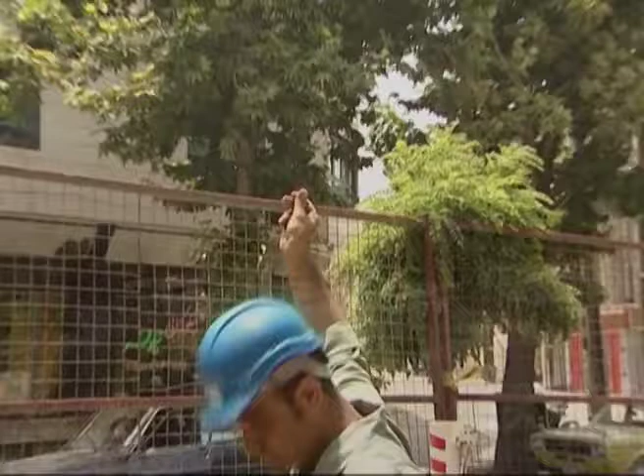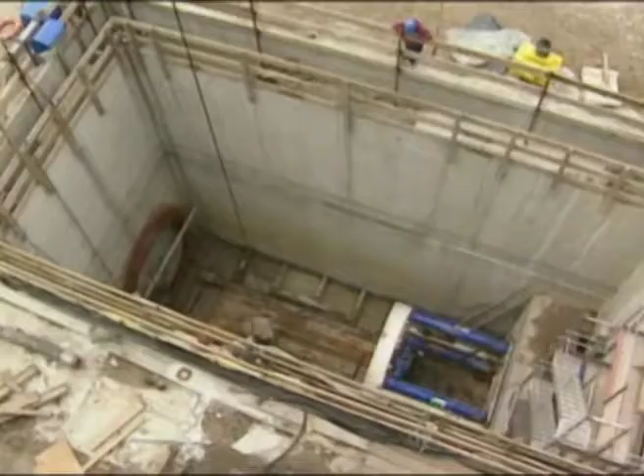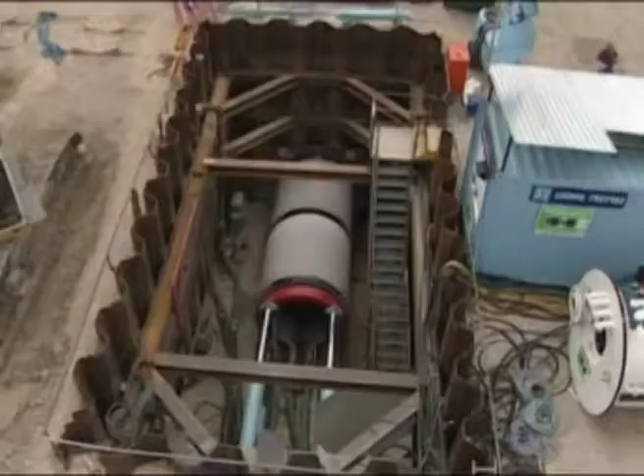During the last several decades, introduction of trenchless technologies have brought about great changes in the installation of underground services, particularly in large cities. Trenchless technologies enjoy numerous technical, economic, safety, environmental, and social advantages.

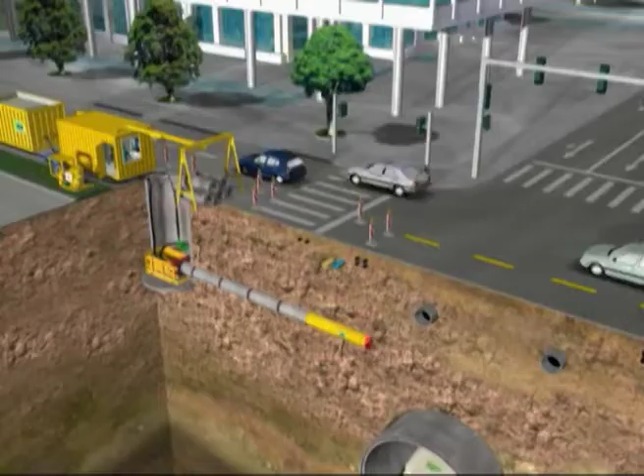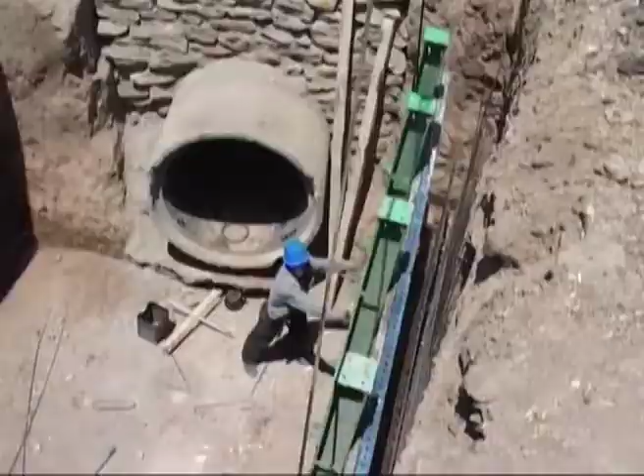Technologies such as pipe jacking and micro-tunneling have enabled engineers and contractors to overcome traditional limits of open trench pipe laying techniques and are becoming increasingly important in the installation of new service pipes and sewer pipes.

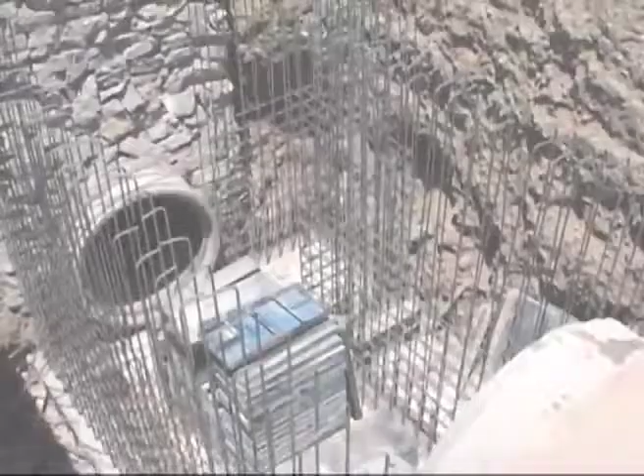The intensification of global warming in recent years and the dangers it poses to the very survival of man has highlighted the urgency of sustainable development in large as well as small countries in all parts of the world. Slowly but continuously, old approaches to the installation of underground services are being replaced by environmentally friendly technologies.

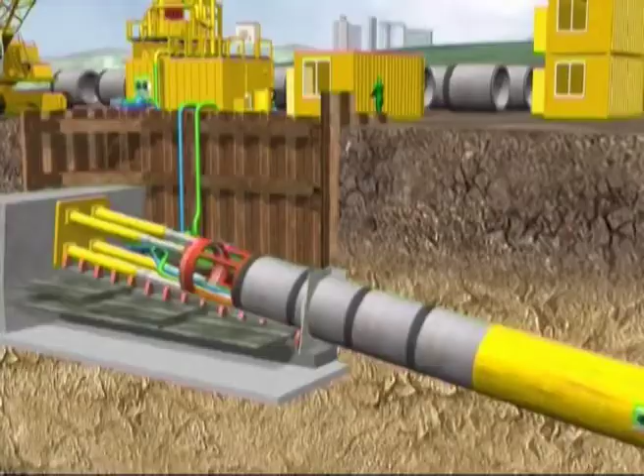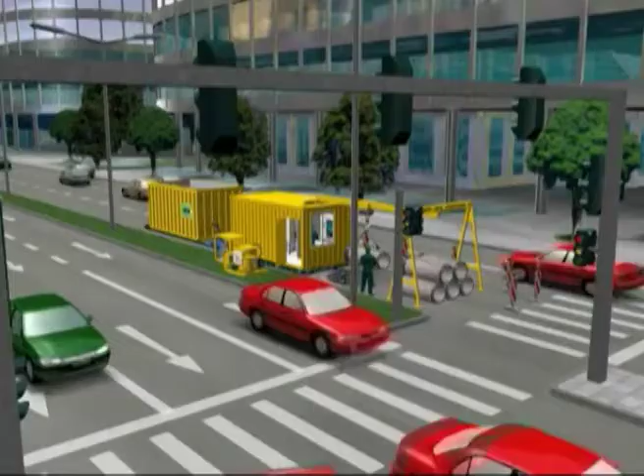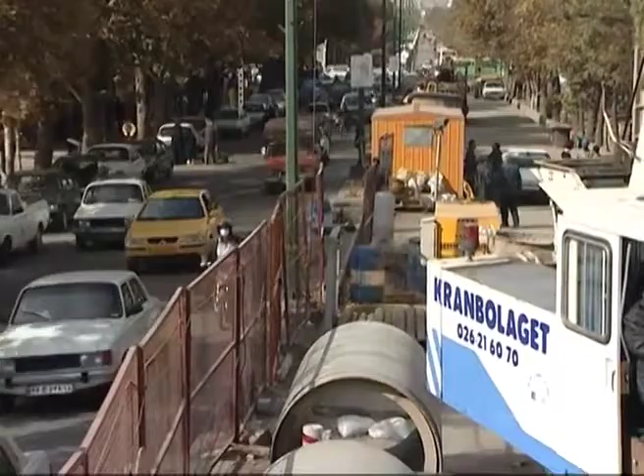Pipe jacking causes minimal disruption on the construction route, so there is virtually no interference with the flow of traffic or impact on the local economy. In fact, the whole construction site can be located in a way that only one lane is blocked.

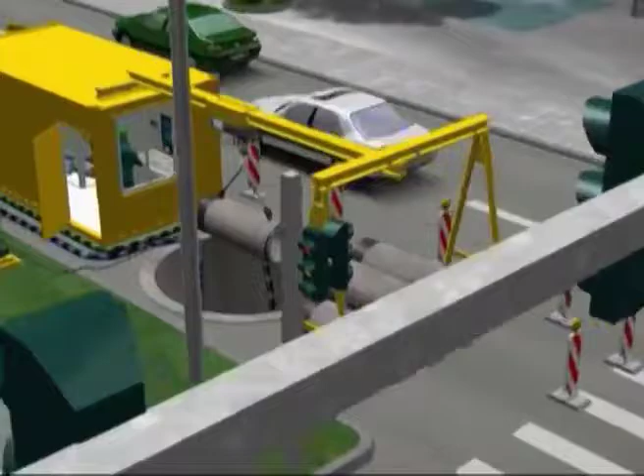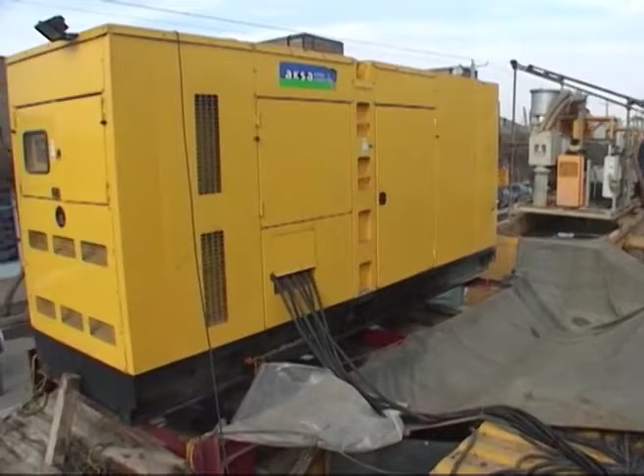Site mobilization including machines and equipment are mounted on a platform adjacent to the starting shaft. In Hamadan sewer pipeline project, the containers and some equipment were placed on top of each other to make the construction site as compact as possible.

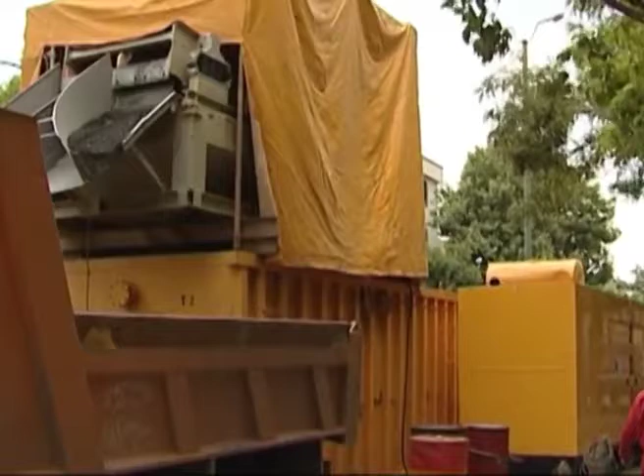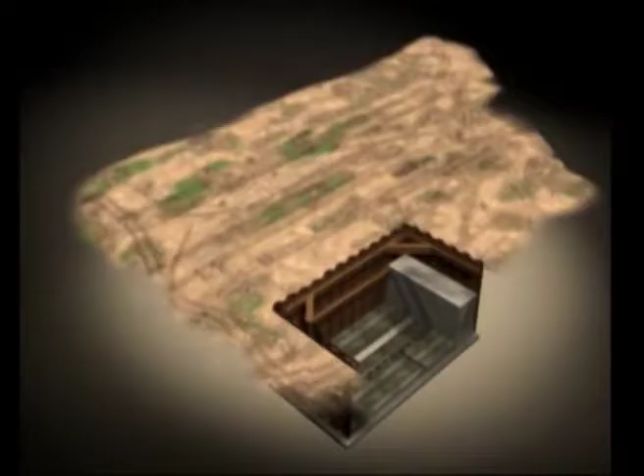In order to install a pipeline using pipe jacking and micro-tunneling techniques, at the first stage thrust and reception shafts are constructed. The pits are either multilateral or cylindrical. The depths and dimensions of the pits depend on the slope, inclination and length of the pipeline.

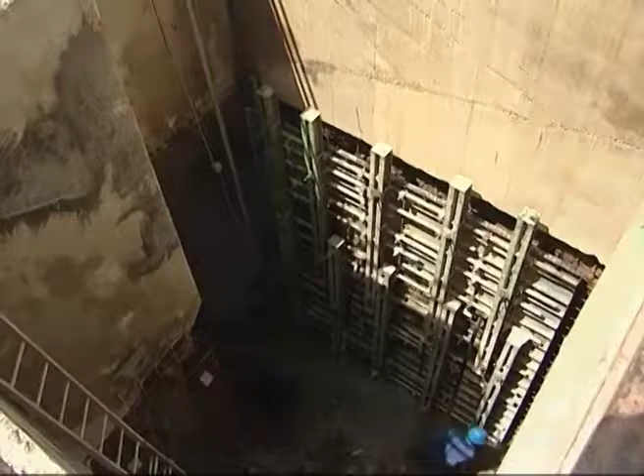In the case of Hamadan sewer pipeline, the starting and reception shafts consisted of rectangular shafts of reinforced concrete with average depths of 7 meters and dimension of 20 to 30 meters. In Hamadan project, the distance from the driving to reception pits ranged from 60 to 120 meters.

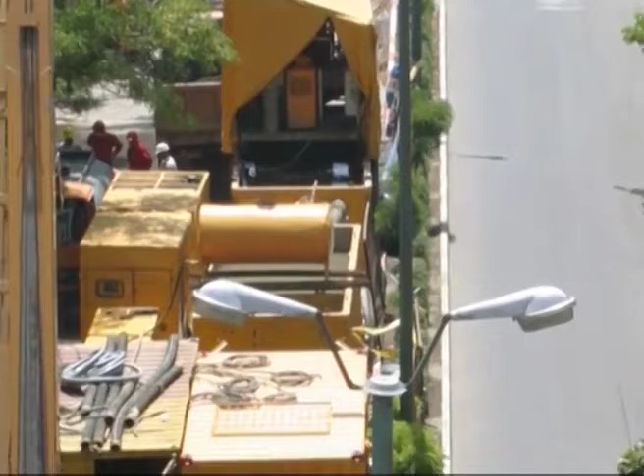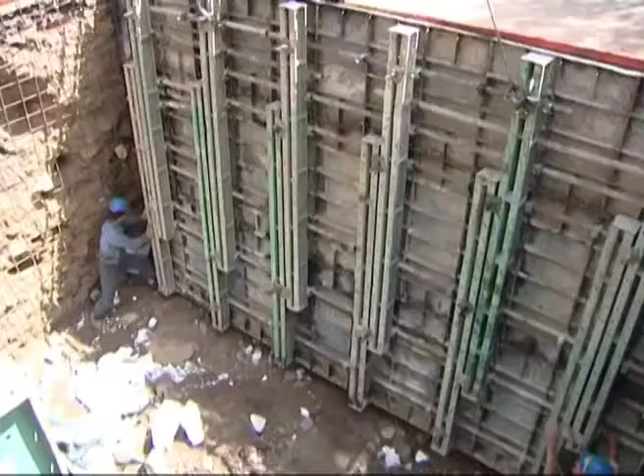However, there is no theoretical limit to the length of individual pipe jacks, and under suitable geological conditions and by using the right equipment the length of pipe jacks can be increased to 1,000 meters or more. Excavation operations and consolidation of pit walls are carried out stage by stage until the desired depth is achieved.

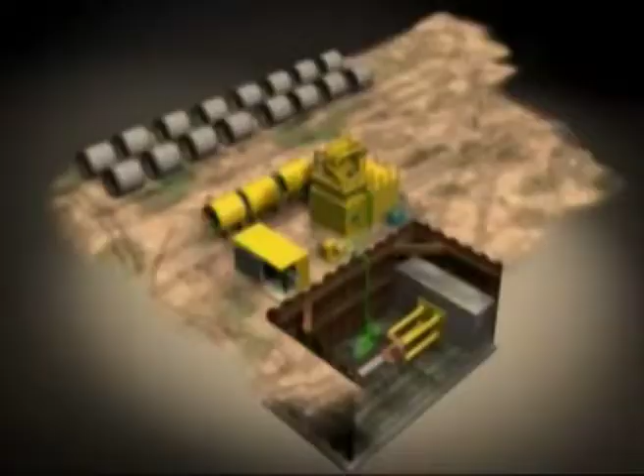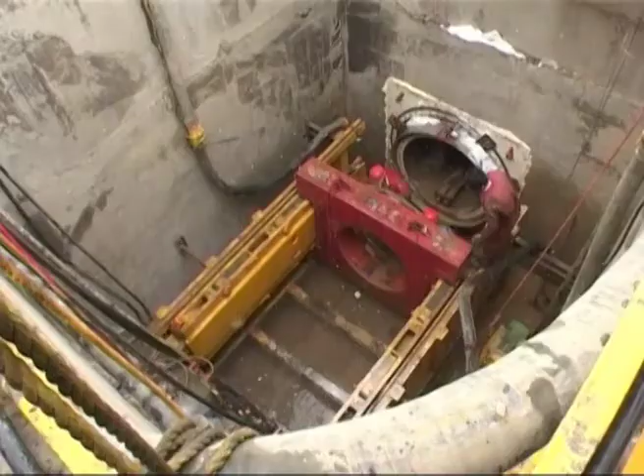In Hamadan sewer pipeline project, all the walls of the driving pit were made of reinforced concrete. A thrust wall was also constructed in the back of the pit to provide a reaction against which to jack, and a thrust ring was employed to transfer the loads. Since the jacking frame remains in the driving pit throughout the pipe jacking operation, the floor of the pit is also covered with reinforced concrete to increase its strength.

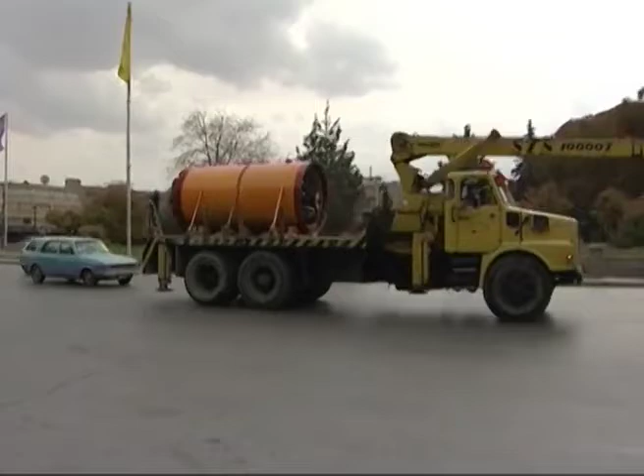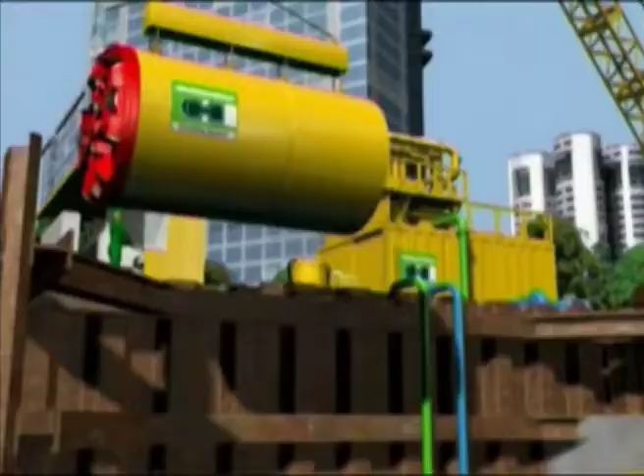The pipe jacking machine and related equipment are transported to the driving pit by a trailer truck. After the pipe jacking machine is placed into the driving pit by a crane and aligned, and ancillary parts and equipment are connected, jacking operations get underway.

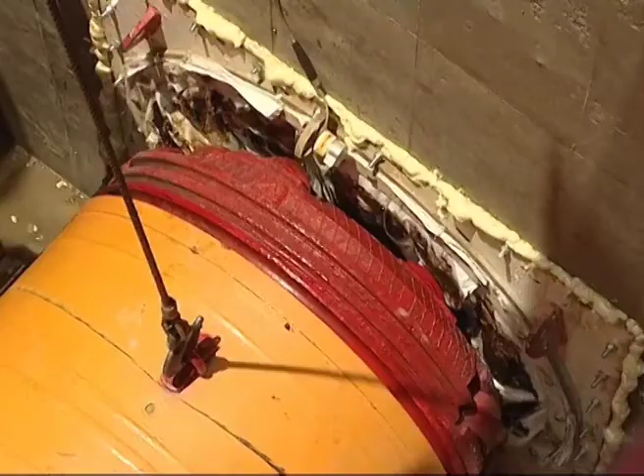The cutting wheel of the boring machine rotates at the speed of approximately 3 to 4 times per minute by means of a hydromotor attached to it. Rocks and stones are crushed by the discs of the cutting wheel. The boring machine is pushed forward by a hydraulic jack situated inside the driving shaft.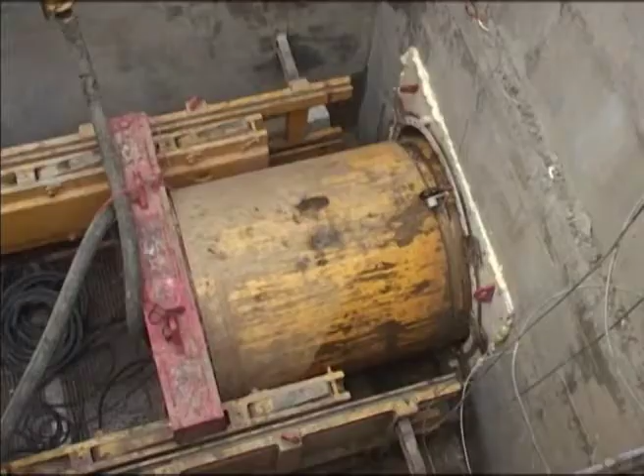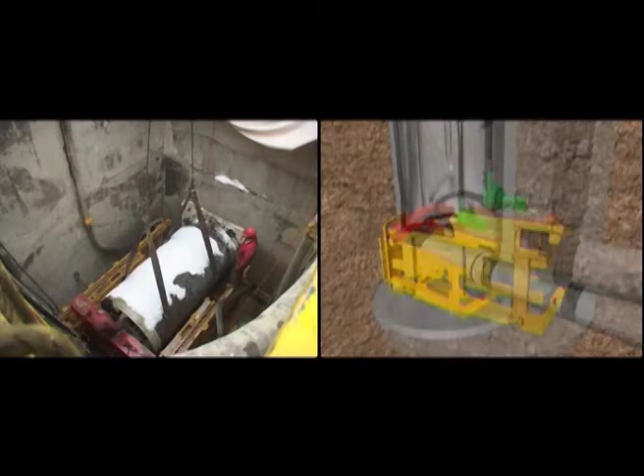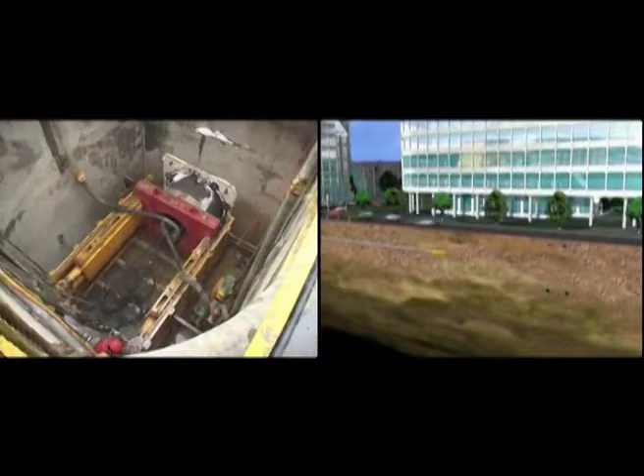In Hamadan sewer pipeline project, the first pipe was jacked after the microtunneling machine and its ancillary parts, with a total length of 6 meters, had been placed into the driving pit and started excavation operations. The pipes are loaded into the driving pit one after another and jacked. This operation continues until the microtunneling machine reaches the reception pit.

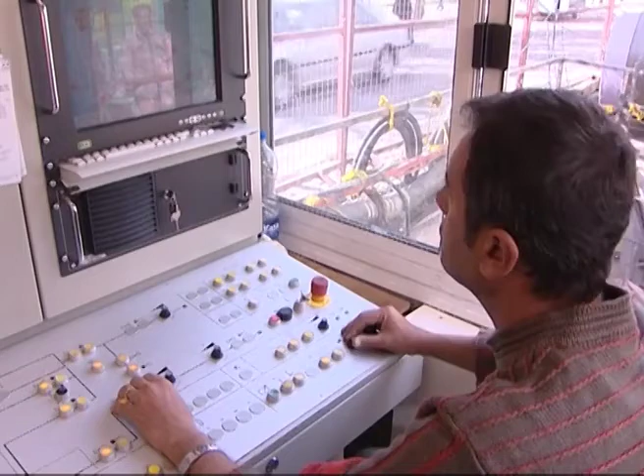The control room is situated right next to the driving pit. Orders to commence jacking operation, as well as monitoring, aligning and correcting the direction of the tunnel boring machine are carried out by operators stationed in the control room.

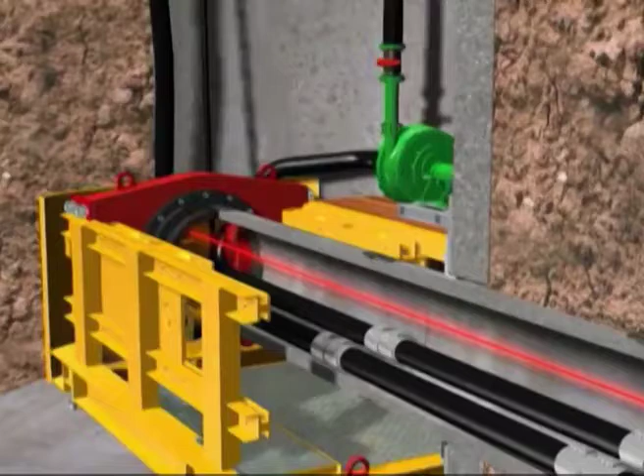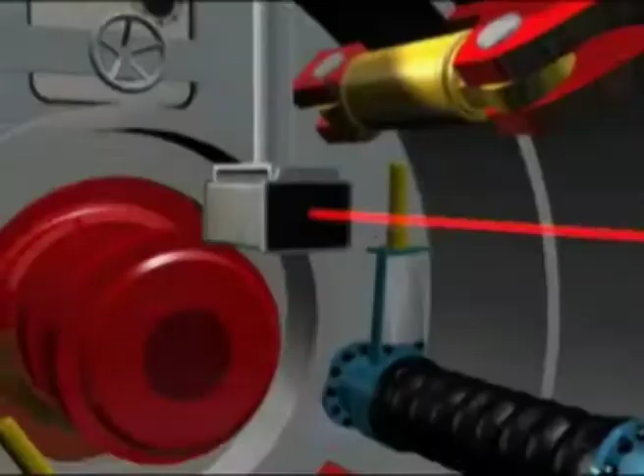Therefore, the position of the cutter head is continuously updated with the help of a laser measuring system. This laser system is positioned in the starting shaft, meeting the target that is installed in the cutter head. The laser target identifies any deviation which may occur. The coordinates are transferred to the steering computer in the control room and visualized on the screen.

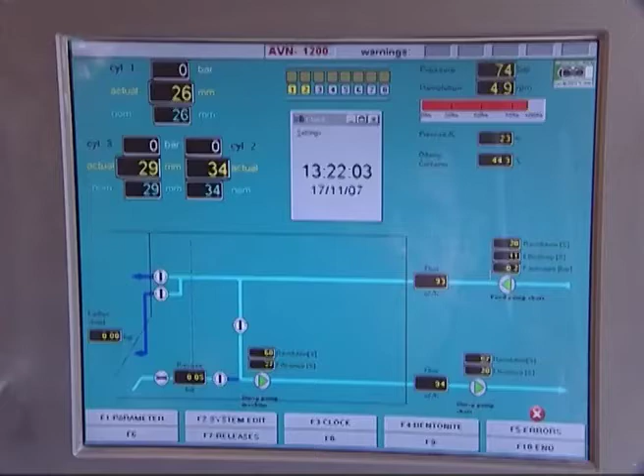Any deviation in direction can then be corrected by experienced operators by adjusting steering cylinders at a push of a button on the computer control panel, in accordance with the jacking speed, ground conditions and inclination of the line.

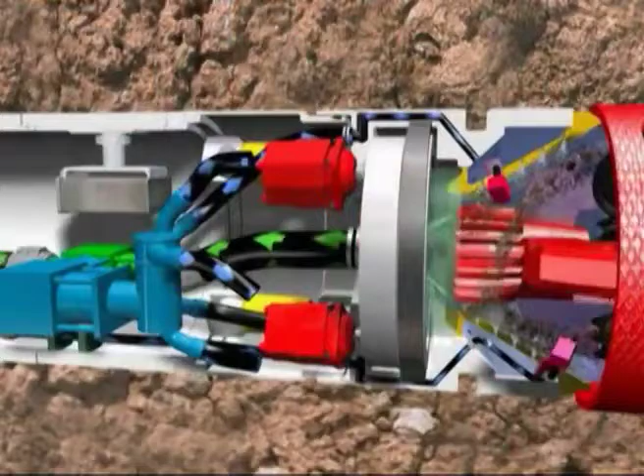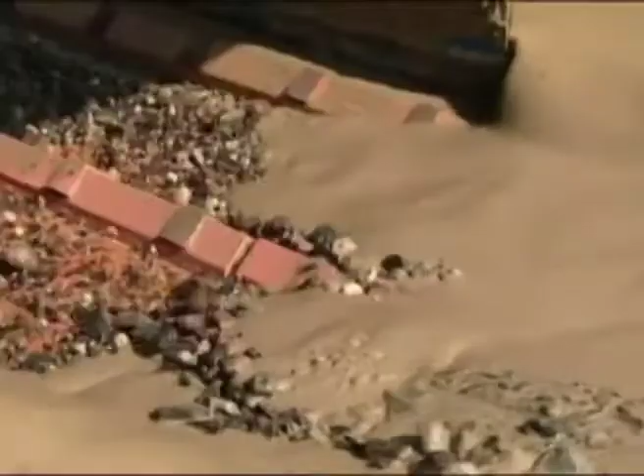To remove the material excavated by the cutting wheel, water from tankers located outside the driving pit is transferred by the feed pump to the tunnel face. The mixture of water and excavated material is transferred by the tunnel pump to the driving pit, where the slurry discharge pump removes the excavated material and pumps it to the separation plant. Thus a closed circuit, whereby the spoil is continuously removed from the system and clean water returned to it, is created.

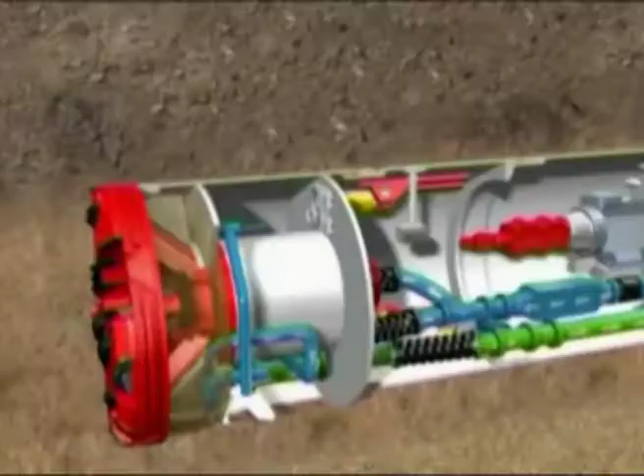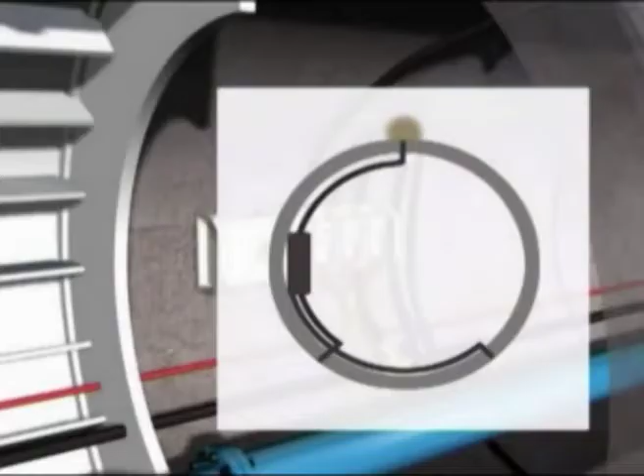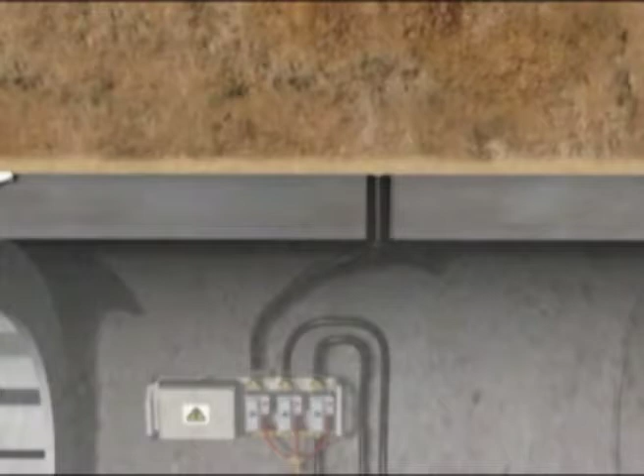Friction is one of the most difficult challenges facing microtunneling and pipe jacking techniques. Friction increases with pipe diameter, as a greater surface area of pipe is presented to the internal surface of the bore. In Hamadan sewer pipeline project, the problem of friction was addressed by using a suspension of bentonite mud. This suspension was pumped to the cutter chamber via a system of pipes arranged within the jacking pipe.

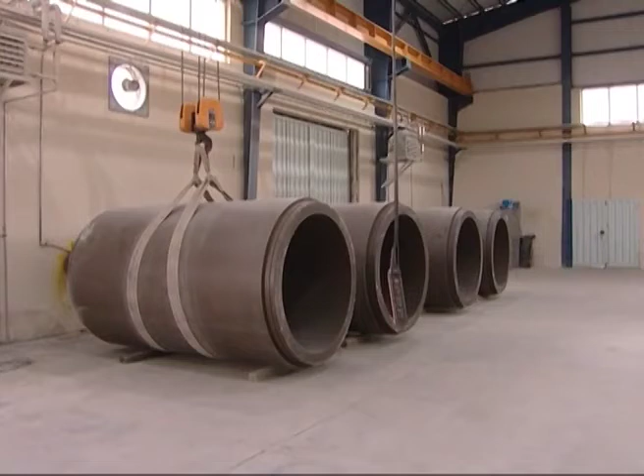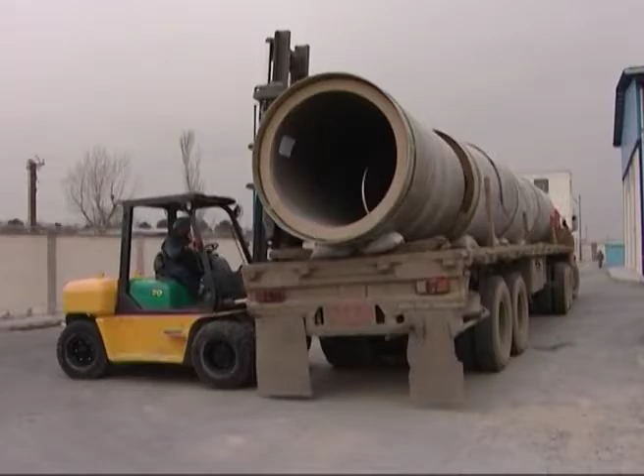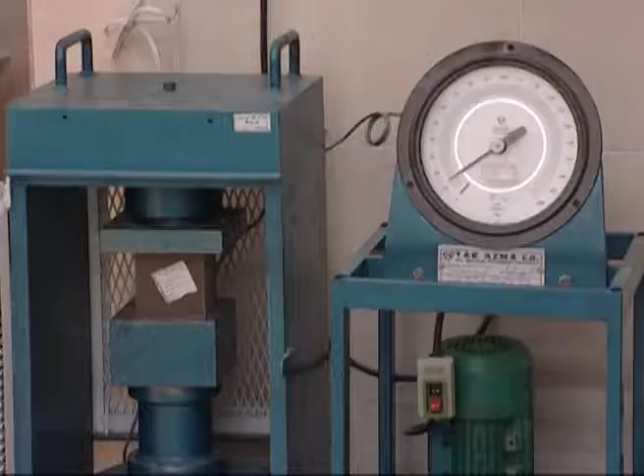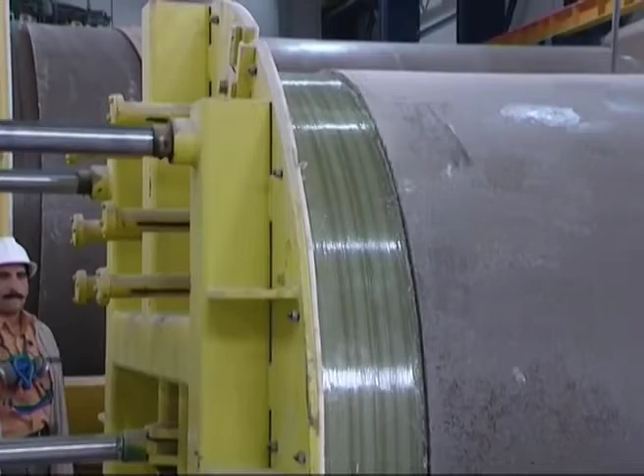Polymer concrete pipes have many advantages, including durability, longer useful life, high compressive strength, corrosion resistance, reduced skin friction, smooth, even, non-porous outer pipe surface, ease of installation, and uniform distribution of jacking forces.

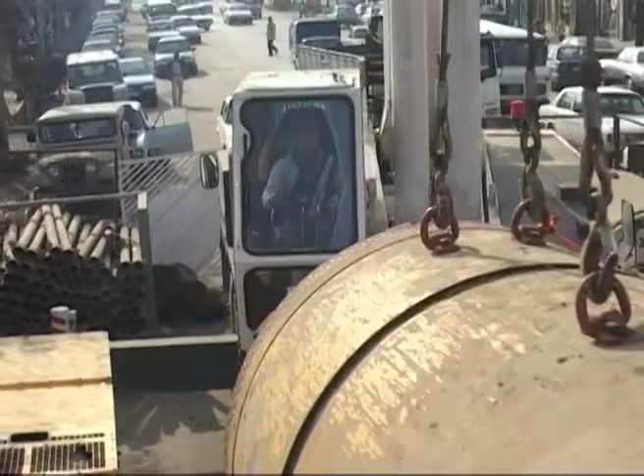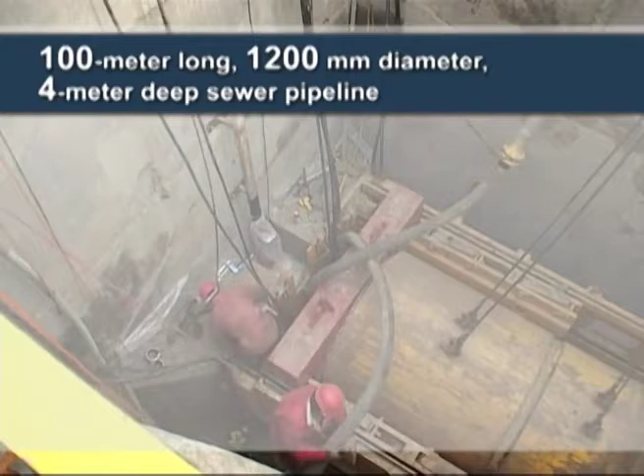Trenchless technologies such as pipe jacking and micro-tunneling also have numerous environmental, social, and economic advantages when compared to open-cut pipe laying methods. In a recent study, the International Pipe Jacking Association compared the environmental, social and economic aspects of open trench and pipe jack sewer construction in a 100-meter long, 1,200 mm diameter, 4-meter deep pipeline. The results were as follows.

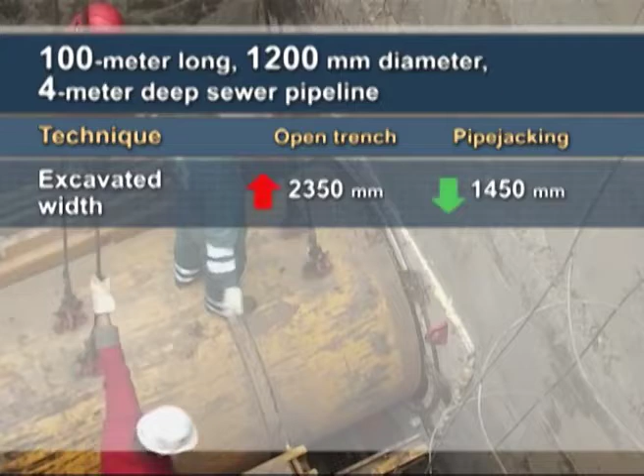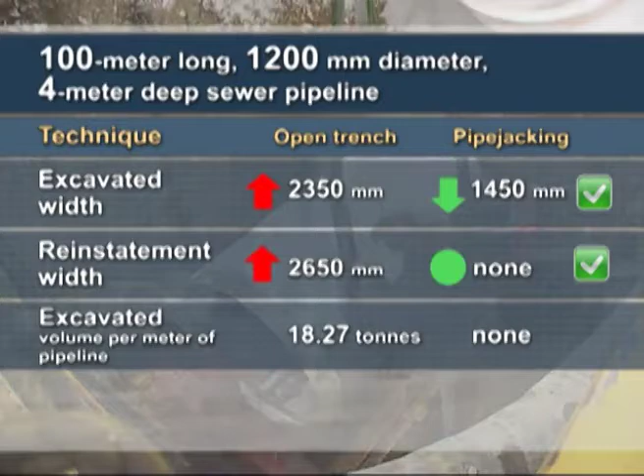Excavated width: in open trench 2,350 mm, in pipe jacking 1,450 mm. Reinstatement width: in open trench 2,650 mm, in pipe jacking, none. Excavated volume per meter of pipeline: in open trench 18.27 tons, in pipe jacking, none. Number of 20-ton lorry loads per 100-meter pipeline: in open trench 320, in pipe jacking, 21.

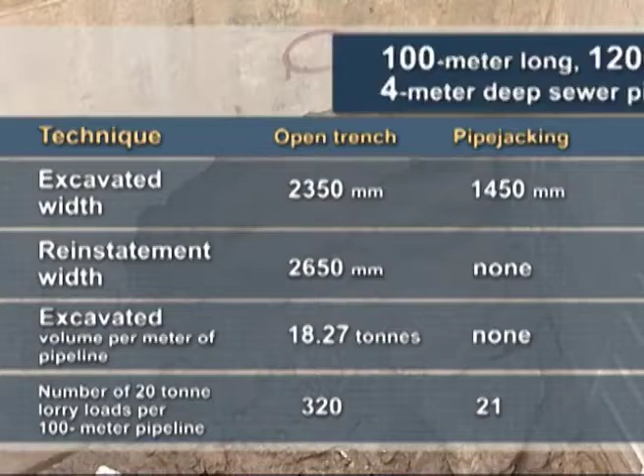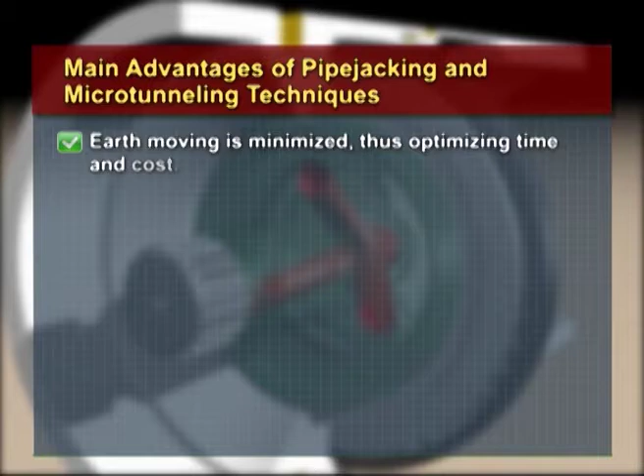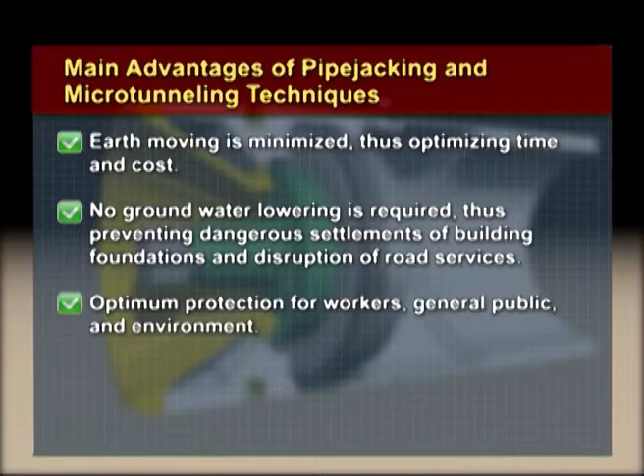Main advantages of pipe jacking and micro-tunneling techniques. Earth moving is minimized, thus optimizing time and cost. No groundwater lowering is required, thus preventing dangerous settlements of building foundations and disruption of road services. Optimum protection for workers, general public, and environment. Traffic flow and nearby businesses are not affected. Construction work is not influenced by weather, enabling contractors to meet deadlines and budget constraints. Enables engineers to drive a curved alignment.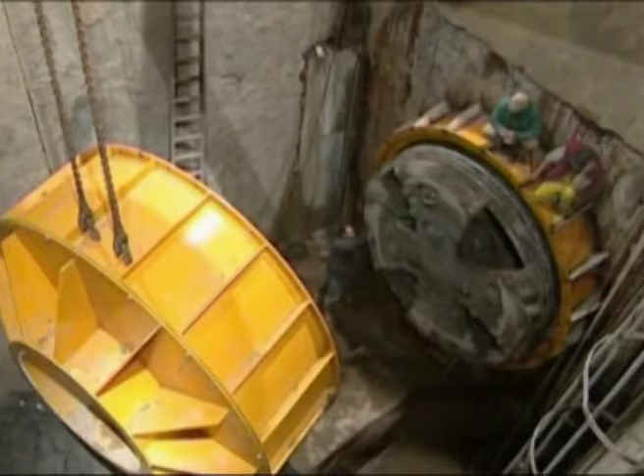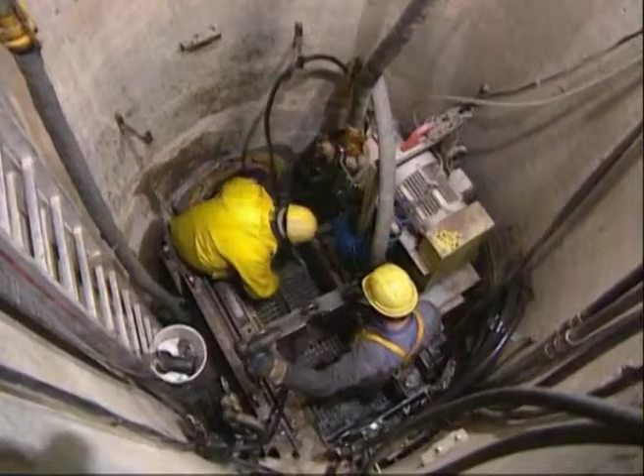Trenchless technologies in general, pipe jacking and micro-tunneling in particular, have the potential for significantly improved social, economic, and environmental performance relative to other technologies. Trenchless technologies are constantly pushing back the boundaries of all forms of underground work required to support human settlements.

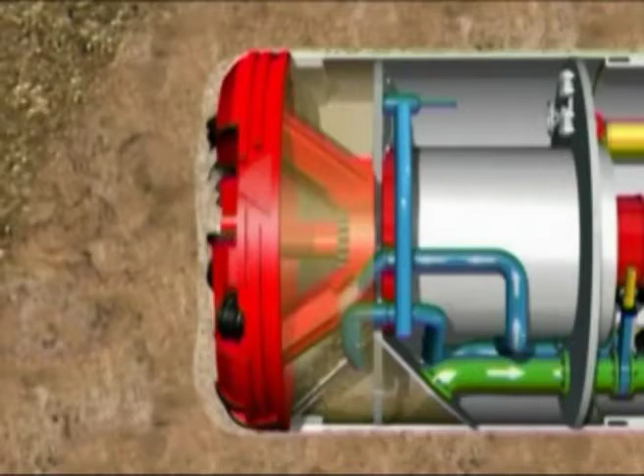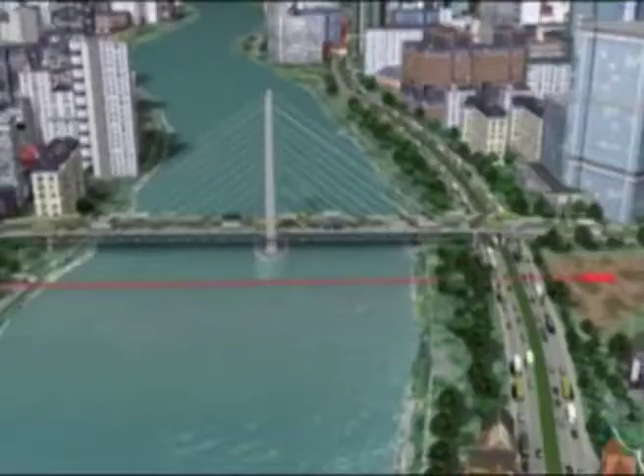Engineering innovations and process improvements enable clients and contractors to increase pipe diameters and the length of individual pipe jacks, and improve speed and precision. Where previous work was limited to depth dictated by safe open-cut methods, depth is no longer a limiting factor. Where services already exist, they can be refurbished. And where new services are required, they can be constructed beneath the existing structures, under rivers and even open seas.

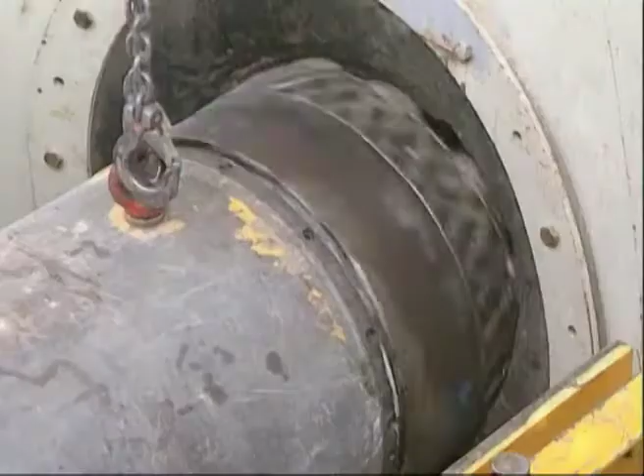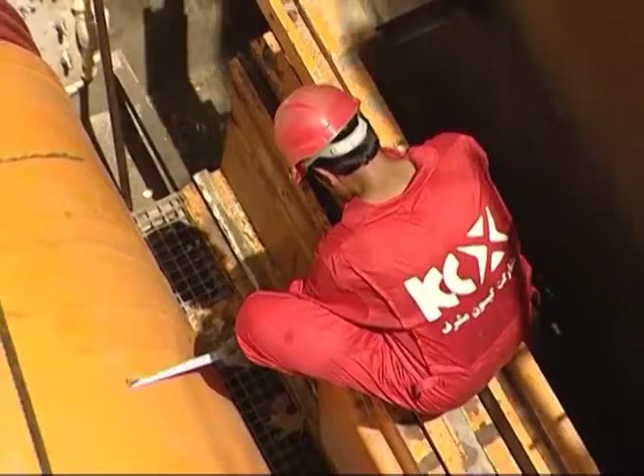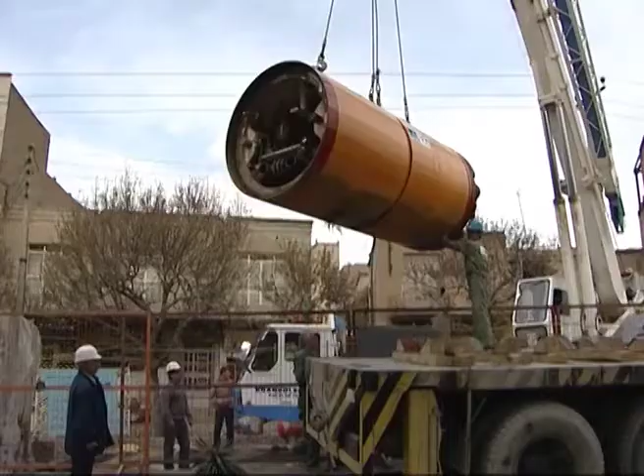Most importantly, trenchless technologies help us conserve resources, protect the environment, achieve sustainable development and build a better world for future generations. As one of Iran's leading designers and builders of environmental infrastructures, Kayson hopes to build a greener world by employing advanced technologies in promoting environmentally sound approaches to the construction of underground services.